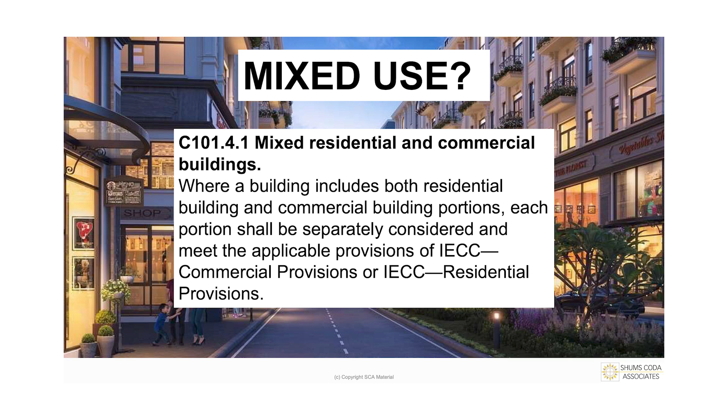Mixed use, all right. So here's where it gets to be a lot of fun. If it happens to be considered a mixed use, it's a 3-story building, and let's just pretend that bottom floor is the commercial portion, right? It's a coffee shop. It's a beautiful coffee shop, wonderful coffee shop that serves all the residents in those upper 2 stories. Those 2 stories above that commercial is considered residential out of the energy code.

So now what you're going to do is you're going to take the provisions of the commercial side, apply it to that 1st story, then go into the back of the book, take the provisions of the residential and apply those to the next 2 stories of the structure.

So because, as I mentioned, this is an interactive class, what is a possibility of how you would demonstrate that on a set of plans? Because is the thermal envelope requirements the same for commercial side as the residential side?

No. So how are you going to be able to demonstrate this on a set of plans to ensure that you present your design appropriately to the building department, that the building department can say, yes, these plans meet the requirements that you find in the code? Then they're able to go out in the field, and so that the contractor is able to understand and know exactly how this building was designed. Any thoughts?

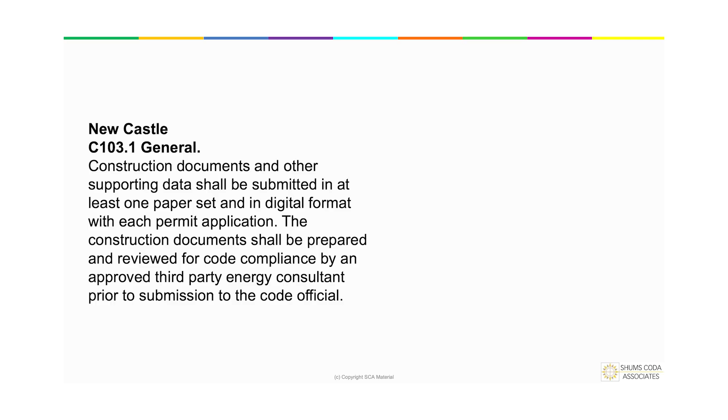Another community - anybody here work in New Castle? New Castle does require that at least 1 paper set and a digital format be provided, and the construction documents have to be prepared for code compliance by an approved third-party energy consultant prior to submission to the code official. So if you end up working in New Castle, just be aware that there is this requirement.

All right, so before we can actually have the discussion about the thermal envelope, one of the things we have to be fully aware of, because it really determines how you're going to treat the thermal envelope, is which compliance path is utilized.

A lot of times I'll see on plans that they say, I'm going to go prescriptive. Well, when you say prescriptive, I need to know which category or option within the prescriptive umbrella you're utilizing. Is it the R value option, the one we probably utilize the most, everybody thinks of an R20 in the wall? Or are you doing the U factor, C factor, F factor option? Or are you utilizing that component performance alternative, which happens to be COMcheck?

Anybody know when the component performance alternative became a legitimate option within the energy code? What edition did it become recognized in? You can shout it out, take a guess. 2012, little too early. Anybody else brave? 18 is a little late, so that leaves you with 15. There we go.

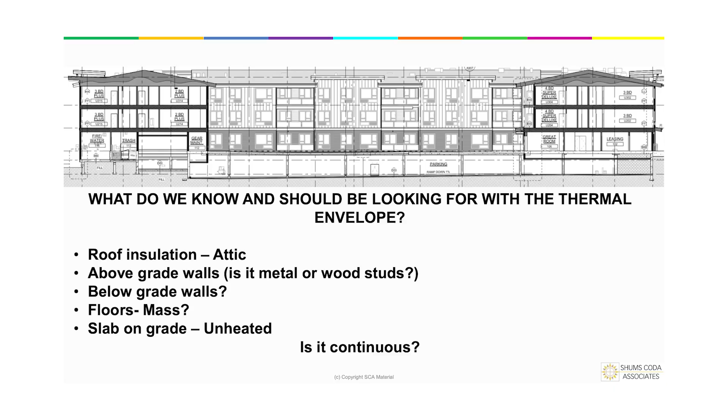So when I look for a thermal envelope, there's some things I look for. I look to see, okay, so where is the insulation for the roof being placed? Is it above roof deck? Is it in the attic? Just so I have a good idea of where I need to be looking for that thermal envelope and potential areas of disconnection.

Above grade walls—are they showing me that maybe they're metal? Are they wood? Just because sometimes that also provides little hints for the thermal envelope.

Do we have any below grade walls? And when I look at below grade walls, specifically, especially in something like this, I'm going to look for garages. Because garages are notorious for having issues with the thermal envelope being continuous.

Floors—am I having to worry about any floors? Looking at this image here, does it look like I have to worry about any floors as part of the thermal envelope? Yeah, there's definitely some distinct possibilities here.

And slab on grade—bless you. Is the slab on grade that's being shown here, one, is it part of the thermal envelope? And if it is, is it heated or unheated? Because that also changes the location of what we're looking for that thermal envelope.

Meaning, if it's unheated, then the thermal envelope is going to reside down those foundation walls. If it's heated, now I also know that I need to pay attention and ensure that we have insulation underneath that slab. And that changes where I look for demonstrations of where the thermal envelope is.

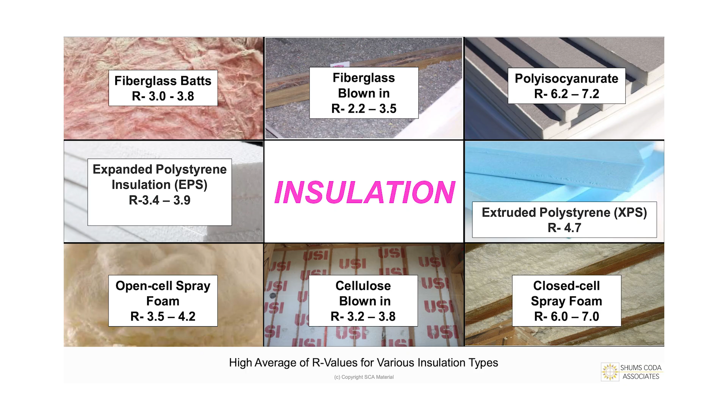All right, so here are some of the more often utilized types of insulation. And what you see on the screen here came from the insulation manufacturer. So this wasn't just Hope doing a search on Google and getting this information. I talked to my colleagues in the manufacturing world, and they gave me the average values that their industry produces for the types of insulation. So as you can see, we go all the way down from a 2.2 all the way up to a 7.2. So that's a significant difference about what we get as far as R value.

Now, one that's not on there that's on a different slide is mineral wool. Mineral wool gets us about between an R 3.8 to a 4.3 per inch, which mineral wool gets called out all the time for fire-rated assemblies. So it's fairly comparable, in fact even better than fiberglass bat insulation as far as R values go. Not better production or anything.

All right, when we talk about thermal envelopes, one of the things that is in the code now on the commercial side that helps with documentation of our thermal envelope is our insulation certificates, right? Now, our insulation certificates are there, and they're required to be placed there when we have a type of insulation that doesn't have that R value plastered on it, right?

So mineral wool will have it plastered. Bat insulation has that R value plastered on what R value this material is, but when you use spray foam, right, does it magically have an R value that shows up when it dries? No. So we have to know what type of insulation and how much of an R value it is. So how we do that is have an insulation certificate provided by the insulation installer. Now there are some requirements with it, depending on the type of insulation that it is.

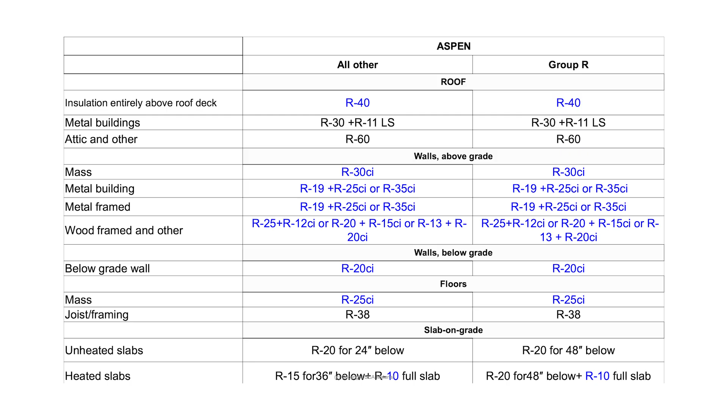I do have a couple of slides dealing with 5. And then these are the requirements if you are designing for Aspen. So if you notice, the values that are listed in blue are the amended values to what you would see within this table. Make sense? I hope. Okay.

So we're going to walk through the components that we have within this table to get a more in-depth view of what we're looking at for the thermal envelope.

So the first one I want to talk about is insulation entirely above roof deck, which we see a lot of in here. If the insulation is entirely above roof deck, you have to demonstrate that you have a minimum of an R30 continuous, or 35, or if you're Aspen, an R40.

Whatever the number is up there, you have to ensure that you meet that as a minimum. Now, with that being said, what do we typically have happen on a roof with insulation entirely above roof deck? Tapering. Yeah - are you looking at my slides? No. So we've got tapering going on, and we want tapering because we don't want our snow or water hanging out on our roof.

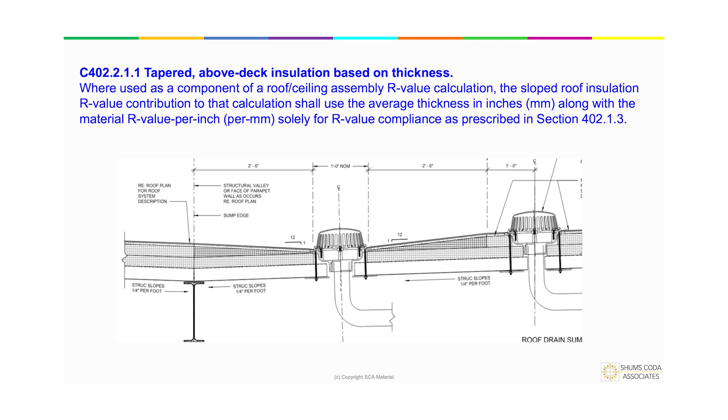We want to drain it away and off the roof. So my question for you is, you have to demonstrate, we'll just say an R30 continuous insulation - how do you demonstrate an R30 continuous insulation when you are tapering that insulation?

You both are right. So basically what they're saying is you can do an area weighted average of that roof, and as long as that area weighted average meets the average or required R value, the R30 since we're just using that one - does that seem like a lot of math? How many people here love doing math? I always have one person who loves doing math. I don't like doing the math. I'd rather just do a minimum insulation and call it a day. Well, that's really good because I'm going to give you a way of doing that.

So one of the things we have determined, because the reality is, if you're trying to get an area weighted average of an R30, what is that going to entail? To get an average, that means you have to have something higher to offset what the lower is going to be. So as a rule of thumb, if you're required to have an R30, if you say I'm going to install as my baseline an R35 with tapering to average an R30, I'm going to accept that all day long.

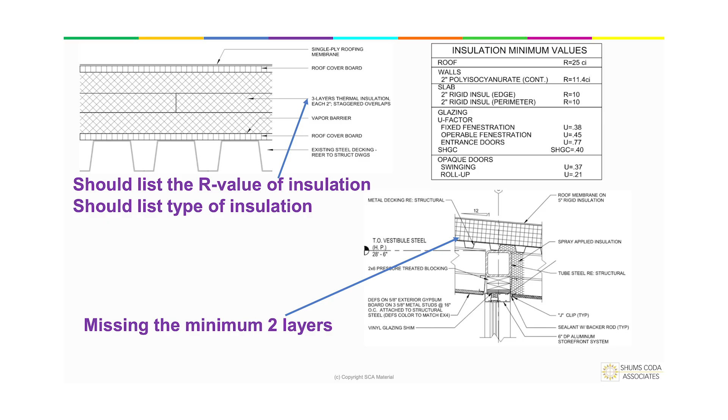Exactly. Rigid insulation, guess what? Rock wool is considered rigid insulation because they have a form of rock wool that they call their rigid insulation. So we got rock wool - that only gives us a 4.8. 4.8 times 5 is not 30, right? Rigid insulation could be the styrofoam insulation, right? And that only gets us, what is it, 3.8? Doesn't get us where we need to.

Now it could be polyiso. 5 inches of polyiso is going to give us better than 35, which would be a great start, but we don't know. Plus, it shows only one layer. It's required that you have to have a minimum of 2 layers for our rigid or above roof deck insulation. So, looking at this image, would you say that it's meeting the requirement that we need for above roof deck insulation?

And it does show the R value, but not on this picture. I'll just give you a hint: the R value of the design met the requirement. So take the R value requirement out of the equation.

What is a stagger? Oh, that's an excellent question. Does the code have a definition of what's staggered? The manufacturer might - ah, there you go. That's where you'd have to go.

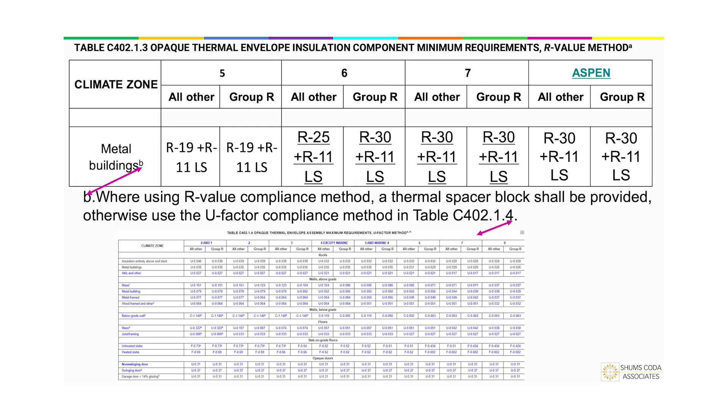The Energy Code does provide a definition as to what a liner system is. That liner system consists of having a vapor retarder underneath the purlins. Then we have insulation placed between the purlins on top of the vapor retarder. And then we have insulation laying across the purlins, going perpendicular to the other insulation installation. And that all together creates a liner system.

So we have the R19. That R19, that first number, is the number that goes in between the purlins. The R11 LS is the insulation that goes over the purlins and over the thermal.

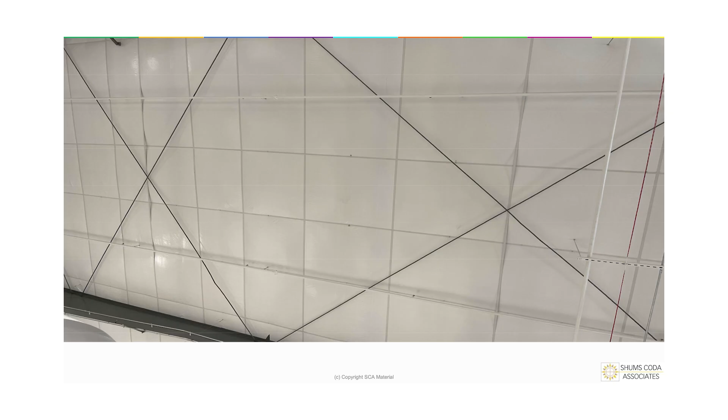So looking at the installation here, would you say, I know you can't see everything, but from the angle that you get to see here, does this meet the intent of what is required for the design of that metal building roof? Yeah, they did a good job. The vapor retarder here is located below the purlins.

Yes. So in the majority of these buildings, you're going to see fire separation occupancies along the length of a 150-foot building. And in our experience, especially in the local counties, the fire separation wall is going to go up and compress the insulation up against the metal decking, up against the thermal break. It's also going to either cut or compress the liner system. Neither one of those are addressed in the code, and the building officials seem to struggle with that. One violation of the fire code for the fire separation wall going cleanly to the metal deck, and being fire safe or caulked, and then the compression and lack of insulation above the firewall.

I'm glad you brought that up, because the Energy Code does address that concept. If you go into Chapter 1, as long as the jurisdiction has not amended out Chapter 1, which unfortunately a lot of jurisdictions have done in the past, Chapter 1 basically says there's a section that says the Energy Code cannot impede safety, health, welfare requirements. That fire separating wall meets that requirement, or that situation.

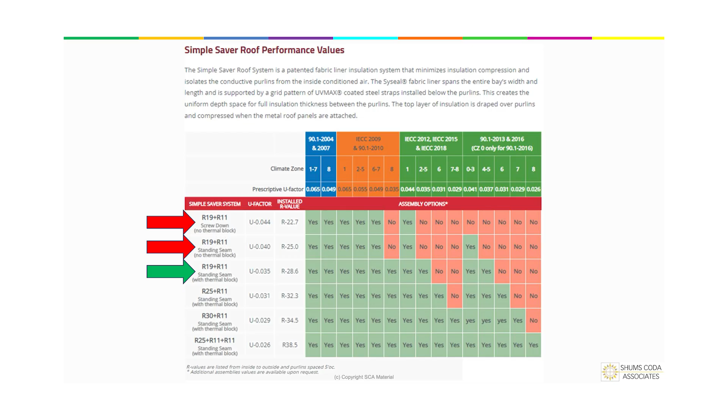Attic insulation probably doesn't need much explanation. You'll notice that if you're in climate zone 7, or designing in Aspen, you're required to do an R60. Keep in mind, depending on the type of insulating material you use, half-inch gypboard may not be sufficient for the structural integrity. You may have to jump up to a thicker gypboard. But it's dependent on the type of insulation and its weight.

The one thing I want to talk about with attic insulation is you cannot rest insulation on top of removable ceiling tiles and count that as part of your thermal envelope. You can have insulation up there, and if you have an office right next to the restroom, I highly suggest putting insulation in that area. I had somebody call and yell about it because she had an office next to the restroom and was tired of hearing her coworker's business. I get it, but otherwise it has to be placed in the attic area and not resting on the tiles.

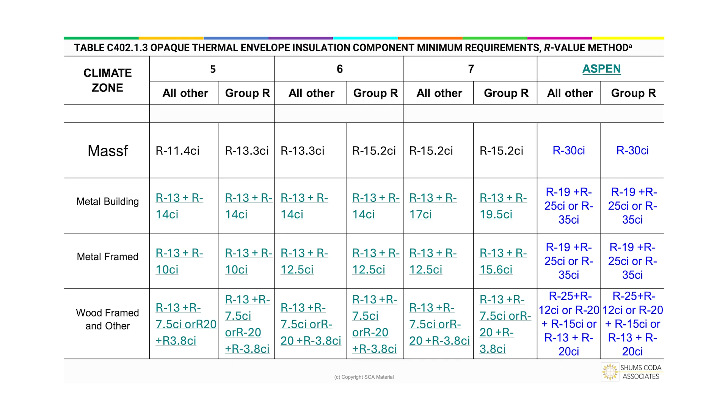For the amount of insulation that above-grade walls would have to have, in climate zones 5, 6, 7, with the last one being Aspen, you can see the insulating values are going to be significantly different. So it will entail a bit more forethought in how you're going to design these for Aspen.

Let's talk about the first one. Our first one is dealing with mass walls. What's a mass wall? Make up a church. That's a good one, Rick. I have to say that's probably the first time I've ever heard that one. I'm going to use it in the future, somehow, some way.

So, mass walls. You see that little footnote F? It didn't come out well here, but footnote F sends you to section 402.2.2, which gives us information about what a mass wall is. A mass wall has to have a component that weighs not less than 35 pounds per square foot of wall surface area. I need to look at this again. The other option is that it weighs not less than 25 pounds per square foot of wall surface area, and has a material weight not more than 120 pounds per cubic foot.

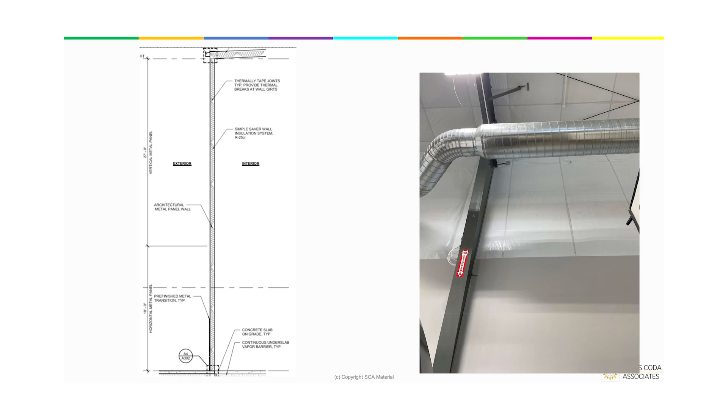As you can see here, not only do you have to install a cavity insulation, you also have to install a continuous insulation value if you're going with the R value table. So in the instance of what we see here, because you really can't see it, what they provided was just insulation. Now they provided a system for it, that Simple Saver system -- I'm not promoting Simple Saver, it just happens to be a lot of times when I get metal buildings, that's the insulation system that they call out on it. But for the walls, in this instance, it's just one insulation layer. It doesn't meet this, even though this says right here, an R13 plus an R14 continuous.

If they were putting an R27 in the cavity, does that count? Does that work? Maybe they'd have to go in and use COMcheck, because even though if you take the numbers 13 plus 14, that does equate to 27, absolutely.

But the R14 is continuous insulation. So basically what you would have if you were just installing 27 is you have 27 in the cavity, an R6 -- 27 in the cavity, R6, because that's the stud R value, potentially -- 27. So is that the same as having an R14 continuous insulation that has no interruption from that framing member that assists with the thermal bridging? Continuous insulation -- I know lots of people have concerns about continuous insulation, but continuous insulation really does have its place in the thermal envelope, because the reality is in physics, it's not made up.

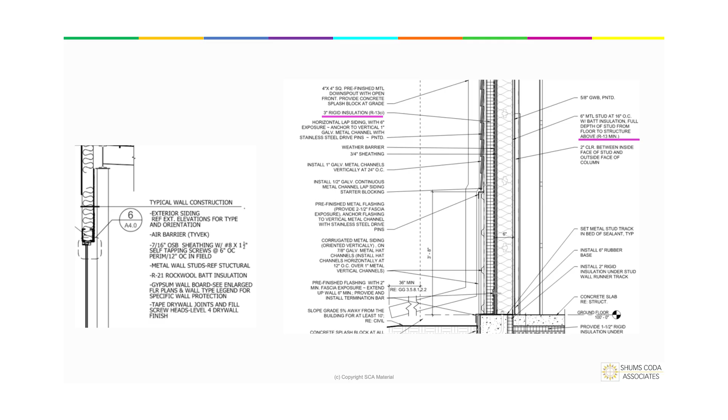Potentially. Here's where it becomes a problem. Right here, it tells me that as an optional replacement of rigid insulation, you can have OSB and house wrap with zip panel. Are we okay with that option? Or did we just reduce the thermal envelope?

Potentially. It's really dependent on the zip panel. Is the zip panel an insulated zip panel? Because they have R3, R6, R9, right? So it could be somewhat of a fair trade if they're going with the R6, but not if it's an R3, because 3 is less than 3.8. It's not a fair trade of an option.

You still have to ensure that that continuous insulation is going to meet whatever it was designed for. So in this particular option, there's a potential that that continuous insulation goes away. What happens when we don't have a thermal envelope installed the way it had been called out on the plans out in the field?

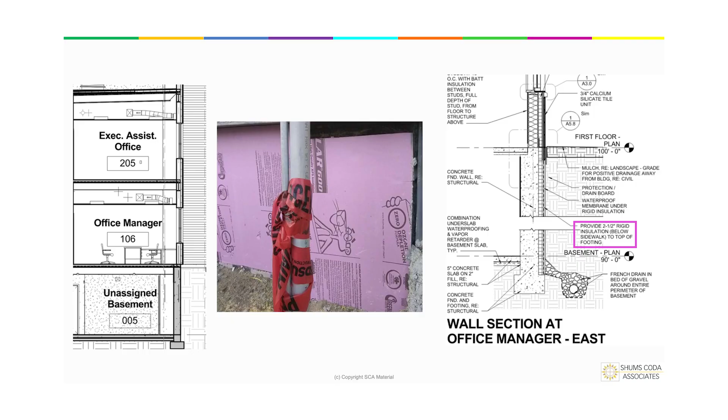So here's an example. How many of you get below grade walls for commercial projects? Anyone? A couple? All right, it's not probably as common as we see with residential, right? But I've had really one project in my career that actually qualified as below grade per the definition.

And it happened to be this one. It was the manager's office, which I felt bad for because they were stuck in the basement, no windows, nothing. It was like, we're going to hide you from the light of day. But they did a fairly good job demonstrating that insulation component.

And it was continuous insulation. Now, the installation of it was shown great on the plans. The actual installation of that continuous insulation, we'll just say there was drastic room for improvement. Everybody has good things and bad things that you need to work on.

All right, let's talk about floors. How many of you just love the idea of figuring out how to deal with a thermal envelope for floors? How many of you cringe as soon as I said floors and thinking about how to deal with it with the thermal envelope? All right, well then, I think it's wonderful.

So if we have mass floors, you're required to have continuous insulation. If you have a joist floor, you are required to have cavity insulation. It also has to be in constant contact with the underside of the subfloor.

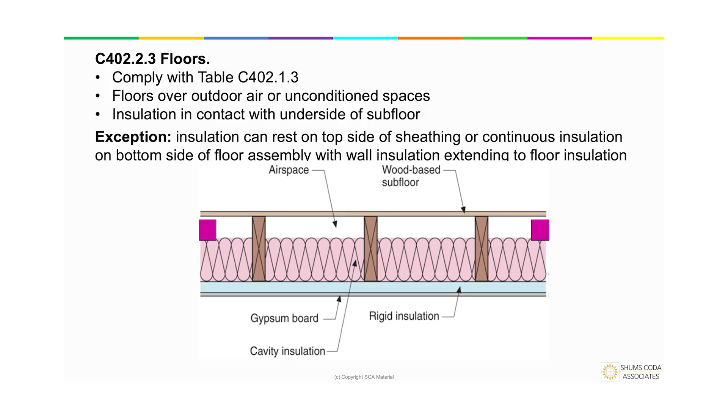Now, what you are permitted to do is extend the above grade wall into the floor cavity and allow that floor insulation to rest on top of gyp or continuous insulation, whatever the case may be, as long as you extend that wall down into that floor cavity.

And the idea is if you don't, then you have that break within the thermal envelope. And so that's why the above grade wall is going to extend down. Doing that on the inside of that as well is acceptable, right? Yes, yes. All right, let's talk about our slabs.

If you have an unheated slab, and that slab is 12 inches or less below grade, you will then have to insulate your slab from top of slab extending down. Obviously, we're making sure we still have continuity of the thermal envelope, but the idea is you're going from top of slab down. You can do it on the interior or the exterior. It's kind of up to you, but the important thing is...

Taking a look here, we have to insulate down for the distance. Now, here's the really nice thing, and I guess we'll talk about it in the next slide, but there is a little caveat for that.

Now, the other one is if it's a heated slab. Now, not only are you going to insulate the foundation, you're also going to insulate underneath the slab. And it's an R5 for the entirety of the slab.

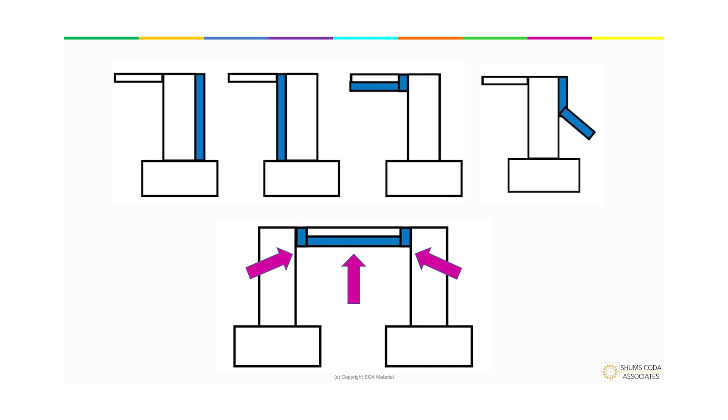And here are some configurations that are accepted. You can have it on the exterior of the slab or the foundation. You can have it on the interior side. This one is always a concern a lot of times for the architects and those designing it. And what we have suggested is, a lot of times the structural engineer is saying, hey, we need a control joint there. So you can ask, will having that continuous insulation there work as your control joint?

I've seen it work, I've seen it not work, or the structural engineer says yes, or the structural engineer says no, because sometimes we need that compression going on as opposed to having that little bit of a break. But that's okay, because you can still place it on the exterior side.

You can go from top of slab, bottom of slab, and then underneath the slab for the remainder of the distance. You can go on the outside, top of slab, extend down, and then extend away from the foundation. But whatever part you extend away has to be covered with at least 10 inches of dirt or concrete.

And then the configuration we have down here is for the heated slab. It goes from top of slab, bottom of slab, and then you have to insulate under the slab. Guess what? They don't require that you do it for the remainder of the distance. Once you get to the bottom of the slab, they're calling it good, because technically your thermal envelope stops underneath the bottom of the slab, right? So you don't have to extend it down further.

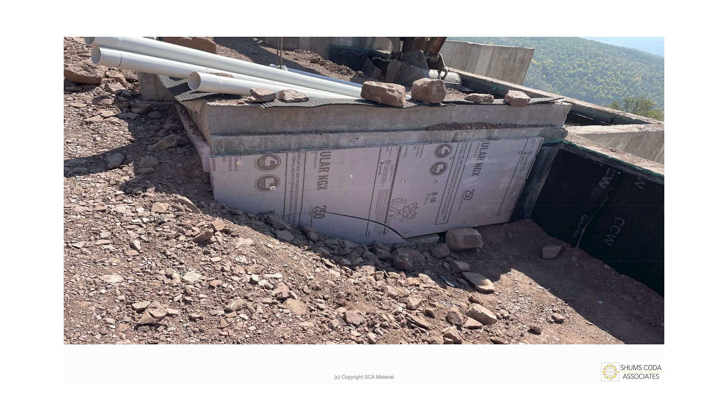All right, so what do you guys think about this one? Here's what I'm going to say. In the installation, something that happens all the time when I go out and take a look, what do you see at that corner? You see a gap. Corners are notorious for gaps to happen, and this is just one of those areas. I could probably pull up 30 pictures of gaps at corners. It's one of those areas that when you first look at it, you think, we got insulation on this side and this side, we're good. But this is an area everybody needs to do better with. That's the area I think we could really work on.

All right, skylights. You have to insulate the curb of the skylight. It has to be at least R5 insulation, or the R value for the above roof deck, whichever is less. So basically just ensure you insulate it to at least R5.

Now, skylights are required if you happen to be one of these occupancies. You have a roof height of at least 15 feet for 75% of the space, and underneath that space is at least 2,500 square feet. At that point, skylights are required.

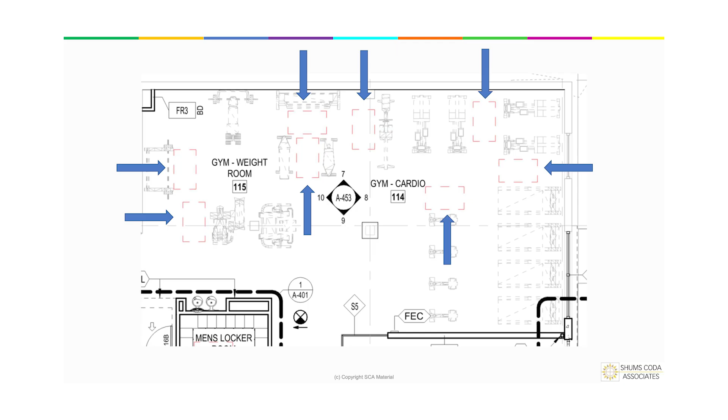Here's an example. Let me show you all the skylights in this gym cardio area. They're required to have a minimum of 3%, not more than 6%. For this project, they had one in the men's locker room, one in the women's locker room, and the remainder of the skylights in this very large gym, probably about 11,000 square feet, all resided in the cardio weight room location. So a lot of natural light to highlight all the efforts of pumping iron, I guess.

All right, let's talk about our glazing, our fenestration. Our fenestration has some very distinct requirements. Here's our requirements if you're just outside of the 2021 code. Here's the requirements if you're working in Aspen. You'll notice that the U factors and solar heat gain coefficient are significantly reduced within Aspen's amendments.

Now let's take a look at the solar heat gain coefficient, because in this table it's broken up by whether you're a fixed window, an operable window, or an entrance door as far as your U factor. When it comes to the solar heat gain coefficient requirement, it's based on whether you're fixed or operable, and it's also listed by your PF. What's PF? Yes Rick, gold star for you, projection factor.

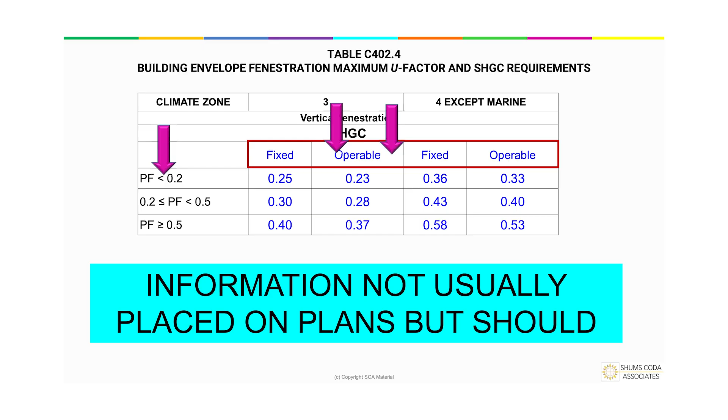Now with the projection factor, that takes us back to which line we would look at. Since it's greater than 0.2 but less than 0.5, this is the maximum solar heat gain coefficient for each window. But here's where it gets to be a lot more fun.

In this design, our projection factor for this window is going to be different than what our projection factor is for the floor above.

How many of you just said, oh, I hate you, Hope? It's okay, I got broad shoulders.

I'll take it. So how this is often addressed, instead of doing all of the math and saying this window has to be a 0.36 and this window has to be, down here, a 0.33, typically what I see on the plans is they'll call out and say, hey, all windows will have a maximum solar heat gain coefficient of 0.33 because that's the most restrictive value in there. And so if everything has that, then all that means is you might have windows that meet what's in this table, and then you might have a few windows that are a little bit better than what's in that table. But it also helps that you don't have to do all that math for every window on every story on every floor, right?

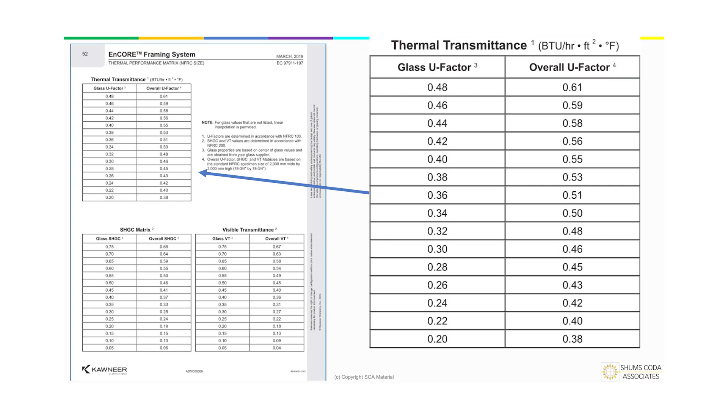So if they say the U factor is going to be 0.32, then you can look at this and get an idea of what that would be. So this is the U factor at center of glass. You'll always get the center of glass and then you'll get the overall assembly U factor. You need to be looking at the overall assembly U factor. So in this instance, we would look in this row to ensure that the windows that are being called out actually meet that requirement.

And then, as Derek mentioned, I'm going to take that NFRC certificate and take a look at the lovely non-easily readable ticket that's left on that window, because it's not like our residential windows that say, hey, I'm a U factor of this and I'm a solar heat gain coefficient of this. We get to take this, try to decipher which number am I looking at to find it on the NFRC certificate to say, oh yeah, that is a 0.38. Oh yeah, that is what the plans say. So that's the fun of it.

All right, the most dreaded new section of the 21, I think, is the air barrier section, because it used to be the choice of you can either go prescriptive, which is follow all of these requirements and we'll call it good, or you can do blower door testing. In the 21, basically, unless you fall under one of the few exceptions, all projects are going to have a blower door test performed. And I would say buckle in and get really good at it, because those numbers in the 24 get reduced significantly. So practice makes perfect.

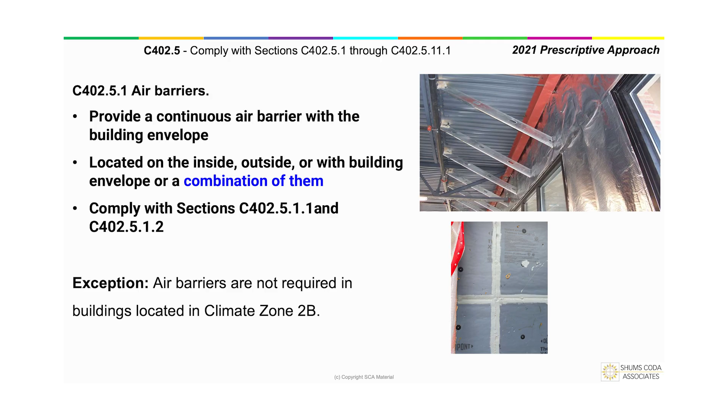So you can have your air barrier on the interior, on the exterior, a combination thereof. Whatever it is, it has to be continuous. And it's not just the walls that are required to have air barriers. The roof, anywhere the location of the insulation and the thermal envelope resides, you have to have an air barrier there.

All right, so the very first one here, it says I want to talk about this one right here. It says you got to comply with C402.5.1.1 and C402.5.1.2. We're going to skip 1 and go directly to 2, and then we'll come back to 1. 2 says, hey, if you're a Group R or Group I occupancy, you're going to comply with C402.5.2.

402.5.2 tells us that you're going to be doing blower door testing if you're a dwelling or sleeping unit. You're going to ensure that you do not have an air leakage rate that exceeds 0.30 CFM per square foot. Now, that metric is a much better testing metric than air changes per hour, which is heavily predominant on volume. When we're looking at this, this is typically like an apartment, multifamily, sleeping units, things of that nature, so you don't have the volume with it, and the CFM per square foot is a much more neutral metric to utilize.

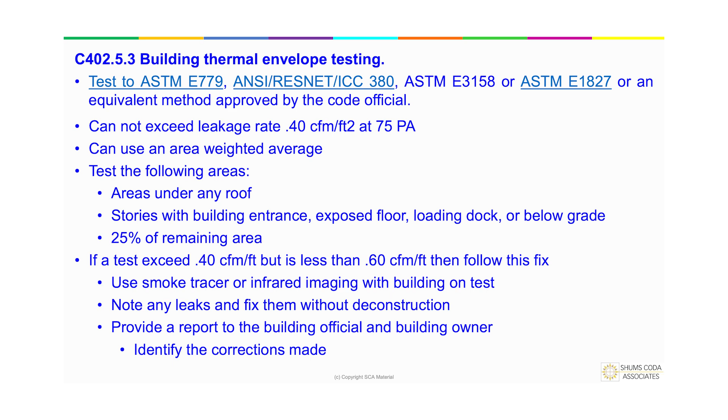All right, let's talk about number 2, which is anything that isn't a Group R or Group I occupancy. Now you're complying with C402.5.3. So let's see what that section has for us. This section has different testing standards than what we saw because it's dealing with a different type of concept for it. It says in this one that you cannot exceed 0.4 CFM per square foot.

Now, the difference between the residential, you're like, well, residential is 0.3. Isn't that less, more restrictive than 0.4? And you have to think of it, it's not exactly apples to crab apples here, because residentially, the Group R and Group I's only had to do it to 50 pascals. Those that aren't Group R and Group I have to do it to 75 pascals. So that's one of the differences on that.

You also get to do like an area weighted average, because we might have, I think we've all had those, right? 50,000 square foot buildings. And so it's going to allow you to do the area weighted average.

Now there are, yes. Oh, I'm sorry. Oh, no, go ahead. On your last slide, we had a project at multiple hundred units, and the unguarded test came back that the inspector required the adjacent units to have doors and windows open.

Well, here's a great thing. So in this particular instance, they have to test it to the testing procedures out of ASTM E779, ANSI, ResNet, ICC 380, which is pretty much what we're used to residentially, or ASTM E1827. So whatever those testing procedures require is how they have to test. The inspector can't say to the contrary because the code says you have to do it per this. And if the testing metric or procedure says those doors have to be open, then you would have to. But if it's not addressed in those testing procedures, you have to follow what these standards require.

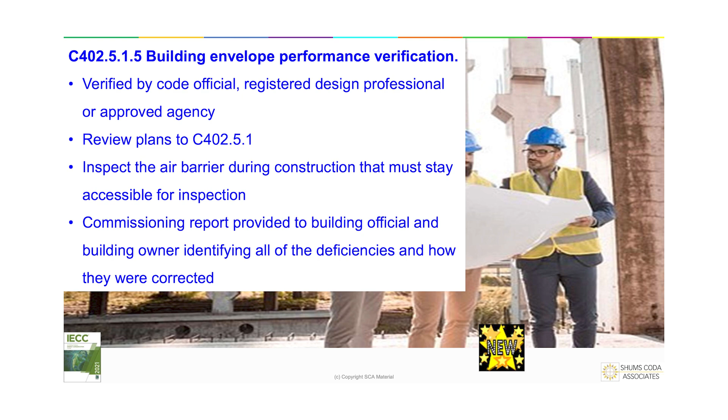Make sense? Now, the third option is if you don't fall under option 1 or 2, now what you're going to do is comply with C402.5.1.5, which is basically thermal envelope commissioning. So you're going to either have the building department, the building official, a registered design professional, or an approved agency do it — obviously somebody not associated with the project.

What they're going to do is review the plans. They're going to document the issues that were found on the plans and how they were corrected for the air barriers. Then they're going to go out into the field, do periodic inspections of the air barrier, and write up any issues that they found, how they were corrected. At the end of the project, a report is going to be provided to the building owner and the building official that states here's where the deficiencies were and here's how they were corrected.

So now what we're going to talk about is the part that basically everybody's going to do — the prescriptive items. These are all things that are not new, we've had them in there forever and a day, so we'll go through them.

Basically, we have to ensure that our air barrier is continuous. We have to take into account that we know we're going to have joints and seams — we've got to seal all those up. We have to ensure that whatever material there is is secured and is going to stay secured, taking into account things like wind, stack effect, ventilation, and all of that.

Number 3 here talks about sealing up penetrations. We've got to make sure that whatever material is utilized is suitable and compatible with what it's trying to seal up. So in those penetrations, you aren't going to use packing tape, right? Because packing tape is not suitable for the material and the location. You might say, that's an odd statement, why would you pick on packing tape? Because the reality is I've gone out and seen packing tape utilized to seal up a penetration. Unfortunately, it happens. Whatever it is, you have to ensure it has the capability of dealing with stack effect, negative pressure, wind, mechanical ventilation, or vibration.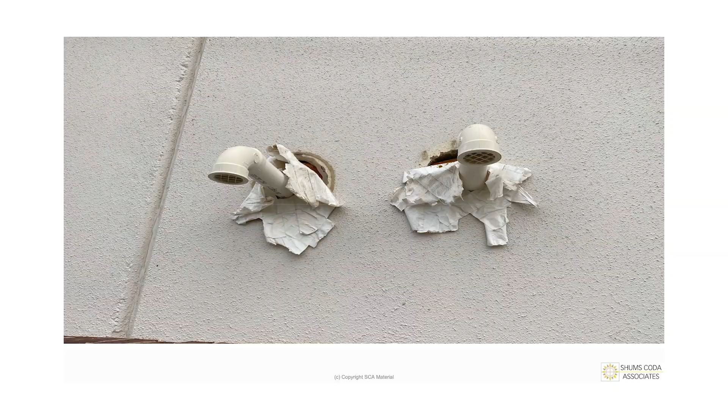So this was, I was at a drive-through, right? They had just redone this whole wall deal due to a natural disaster, so it was supposed to be sealed up. I jump out of the car, and the person driving is like, you got to stop jumping out of the car for pictures, you're freaking me out. But I see this and I take a picture. You could look through and see the other side. So not only was it not sealed, this is an exterior wall, no insulation in there either. So that was a fun one.

Another one to be aware of that I see all the time not sealed up are penetrations going through CMU walls. Just because it goes through a CMU wall does not mean it's exempt from having to be sealed. It still has to be sealed, and you still have to use a material that's suitable for it. Plus you got galvanic action there with steel, so that's why you have to have something compatible.

Packing tape might be a good solution to that. Just kidding. Do you usually get manufacturer's specs to confirm if something is compatible? Is that how you guys are doing that, or? Do you want to know how I do it?

So what I do is really dependent, obviously, on the project. I will require that they specify what they're going to utilize. And just through experience, because I've been given all that information in the past, I can see a material and say, oh okay, I remember that from this project, it was permitted, so it would work with that. So as a whole, for just kind of starting to get that information, I think it's a wonderful idea to have that manufacturer spec that says it will work for this material in this condition. And then you start building that library where you have that experience too, to know this will work with this.

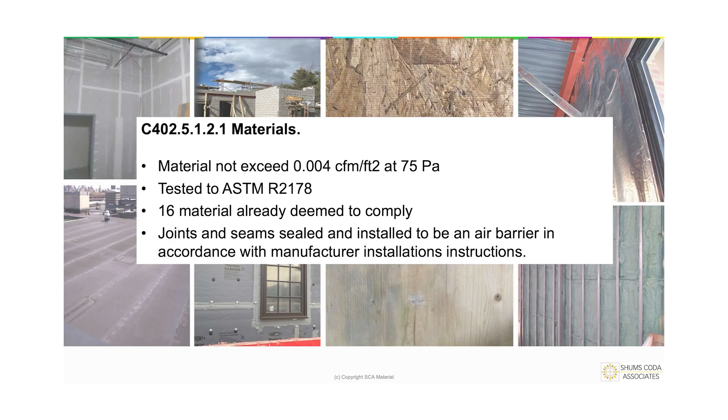Now the Energy Code does have materials that are already deemed to comply. They demonstrate that they do not exceed 0.004 CFM per square foot at 75 pascals. And so the 16 items, we're going to go over them really quick: OSB, plywood. Remember, if you call these out as your air barrier materials, all of these have to be sealed, all the joints and seams have to be sealed. Extruded polystyrene.

This is one material that can take care of multiple requirements out of the code. It can be your air barrier, it can be your continuous insulation. A lot of them are permitted to be your water resistant barrier, so it could also be part of your vapor retarder strategy. So one material can often take care of multiple requirements, and there's a plethora of materials out there that fall under that category.

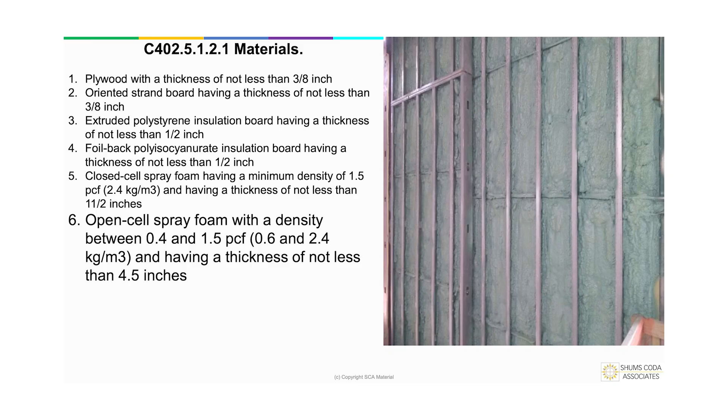Foiled face polyiso, that can also be an air barrier. Open cell spray foam, as long as it's 4.5 inches. Closed cell spray foam, as long as it's 1.5 inches. And then our gypboard or cement board. Our gypboard can be on the interior or the exterior. All we have to have is at least 1/2 inch of it to qualify as an air barrier.

Then we have our 3 roofing materials. Now, the reason why we have 2 11s here is I just wanted to illustrate that things did shift a little bit in the 21. Before it had to be fully adhered single ply, and now it just has to be single ply. So it doesn't have to be fully adhered anymore. So Portland cement sand parge.

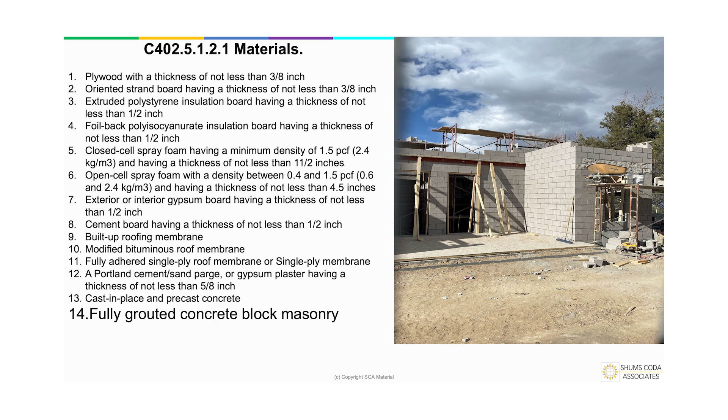We also have cast in place and precast concrete. That's how they meet the requirement of an air barrier. Fully grouted concrete block. Sheet steel or aluminum. This is how metal buildings have an air barrier. Their metal skin is their air barrier.

So those are our 16 items that are already deemed to comply. And then we have 3 assemblies. Now an assembly just has to demonstrate that they don't exceed 0.04 CFM. At that point, then they're deemed to comply as potentially being an air barrier. So as you can see, we got 3 options here for air barriers.

I'd say stucco, probably not, probably one that I'm seeing more and more being called out as an air barrier. So out of those items that I listed, what materials have you seen out in the field called out as an air barrier that was not listed?

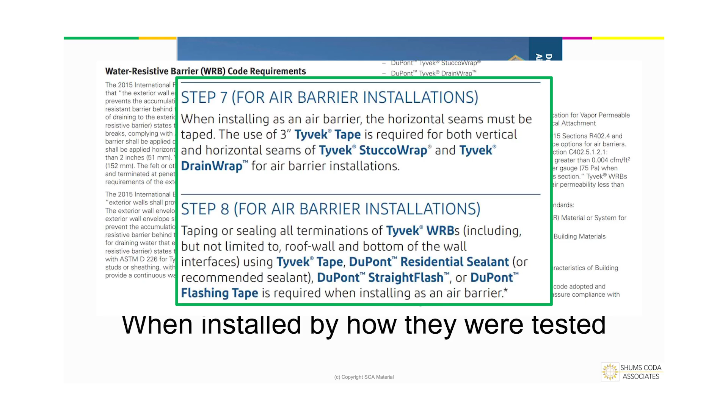So I have had this conversation about the water resistive barrier. Now water resistive barriers, the house wrap, Tyvek, for product name one out there, could potentially be an air barrier. They have to demonstrate that they do not exceed 0.004 CFM per foot. Well, they have been tested. Some of them have been tested to meet that qualification. The reality is you have to install it the way it had been tested. Most of the time it'll say you only need a 6-inch overlap if it's being installed as a water-resistive barrier. But if it's going to be installed as an air barrier, it now goes from that 6-inch to 18 inches.

There isn't, I have yet to see material, and I haven't looked in quite some time, but I have yet to see the material of where for a water-resistive barrier, Tyvek for house wrap, whatever, that has the same installation requirements for a water-resistive barrier as an air barrier. So there are, as far as I know, there are still instances of that out there.

What about DensGlass? DensGlass is often called out as your exterior sheathing for commercial buildings. Is it an air barrier?

All right, let's talk about it. If it's mud and taped, absolutely. Now you'll notice that DensGlass and those types of assemblies, materials, all they are is a 1/2-inch gypboard or 5/8 gypboard with a fiberglass mat on both sides. Remember, in that table are items that are already deemed to comply. Number 7 says interior or exterior gypboard as long as it's a 1/2-inch. So DensGlass qualifies for it.

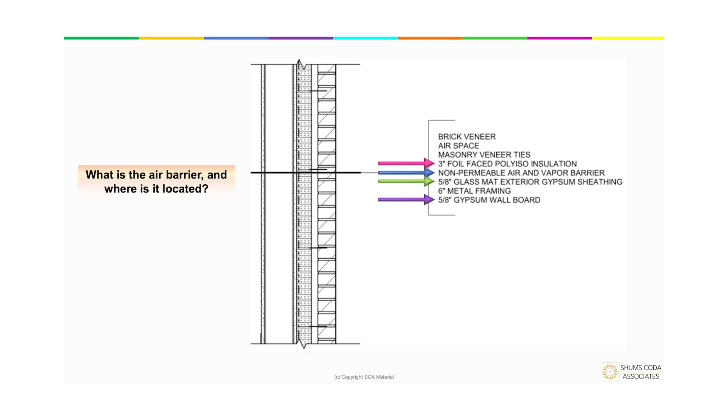Now on the screen here, we have materials that are deemed to already comply, but it's not called out as to what the air barrier is. So one material that could potentially be an air barrier is this non-permeable air and vapor barrier. Now the terminology in there is incorrect. It's not a vapor barrier. Are we talking about a water-resistive barrier or a vapor retarder? Because a vapor retarder is required on the interior side of exterior walls and not on the exterior side. So the terminology is wrong. So that becomes a question.

The other one is we have 3 inches of foiled face polyiso insulation. That's a material already deemed to comply. We have our gypboard on the interior. We also have our gypboard on the exterior. So we potentially have 4 items on there that could potentially be our air barrier. And which one are we paying attention to ensure that it's sealed? That's what we need to get.

And I would say for the architects in the room, get very familiar about calling this out, because when the 24 gets adopted, they have a brand new section that basically gives you a list this long of things that have to be called out on the plans. It can't be placed in the spec book.

It is specific, and the amount of information and details that have to happen now are pretty significant. So I would say start now, since everybody's getting ready to look at 24.

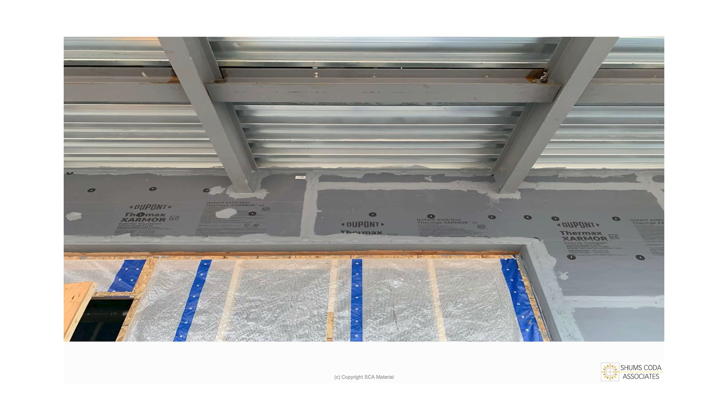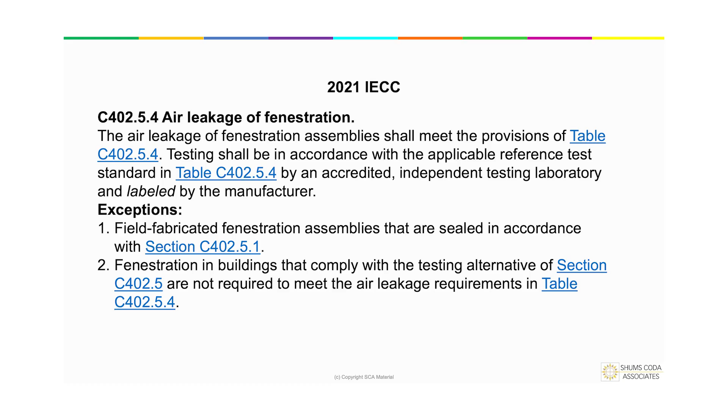Doors leading to chutes, elevators, stairwells, all of those have to be sealed and have weather stripping on them. We have to ensure we've done all this work on our air barriers and our thermal envelope, and then we put these big, enormous openings for air intakes and exhaust, which we should.

But now we're just saying, hey, throw a damper on that to ensure we're doing something good. For cargo docks, we've got to make sure we put something that will limit the amount of air that happens at the top and sides when vehicles are backed in and those doors are open so products can come in and out, right?

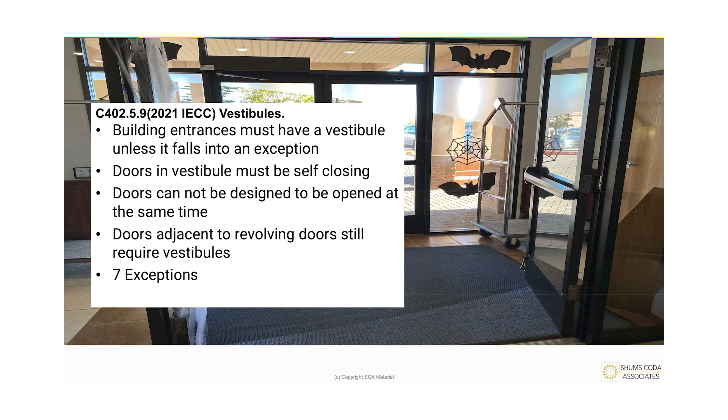Vestibules are required when you have an entrance, unless you fall into one of the exceptions. Those vestibule doors have to ensure that this one opens and this one isn't open, in theory, unless you have people crossing at the same time, then those doors are going to be open at the same time. You're not required to have a vestibule at a revolving door, but we are required by code to have a side door next to that revolving door, so ensure that side door has a vestibule with it. There are some exceptions.

Here's some exceptions to it. Air curtains, you can use an air curtain instead of a vestibule. That actually came into the 2015 code, because until then, if you were an existing building, you had to comply with the full extent of the code except for a couple of exceptions. So the idea was, let's not make them have a vestibule because it's not always conducive when you already have a constructed building. Let's say they can use an air curtain instead. At the same time, in 2015, Chapter 5 came about. This has never been removed, so air curtains are still accepted.

Here's some examples of vestibules. Here's one to be aware of. Most people would think about these doors having to comply, but guess what? This door and this door within that vestibule also have to comply with it.

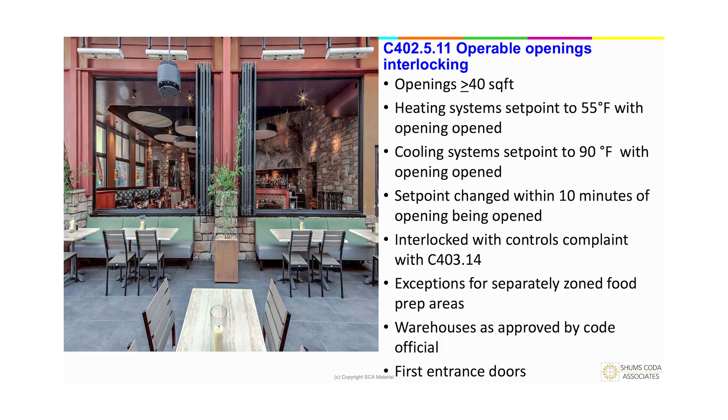The other thing is we have a lot of big, giant doors or walls of windows that open up to let the outside inside. You can do that, you just have to ensure you have interlocking controls so that when those doors are open, the set point for the temperature changes inside, so you're only heating to 90 or cooling to 90 degrees and heating to 55 degrees, unless you have it zoned.

There's an exception for areas where they're cooking food. We don't want the chefs and cooks to pass out from heat exhaustion, so those areas can have different temperatures as long as they're zoned separately.

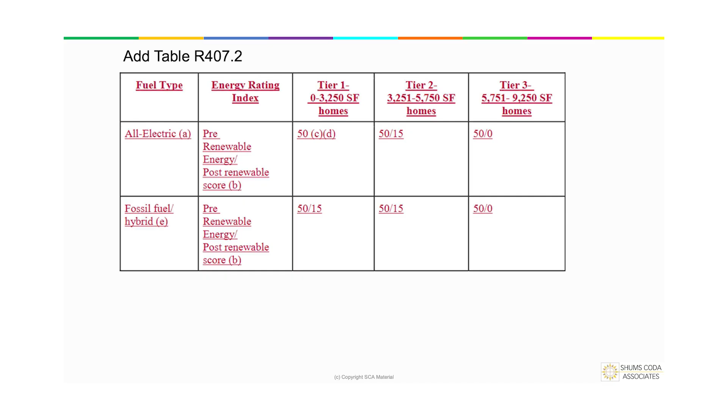407.2 basically says that you are going to demonstrate an ERI score, and your ERI score has to be equal to or less than the value found in table 407.2. Here is table 407.2. I know it's really hard to read, but I had to cut and paste because it wouldn't let me put it into a table, so I couldn't blow up the verbiage and everything on it.

So basically, it's determined by your fuel source. If you have an all-electric building, you're going to follow the first row. If you have a fossil fuel or hybrid system in your design, then you're going to follow the second row.

The first row says, depending on the size of the structure, if you go from 0 to 3,250 square feet, you have to get an ERI score of 50. If you are 3,251 to 5,750 square feet, you now have to get a 50/15, meaning you get a 50 before solar is installed, and then when you have put your solar on, you have to demonstrate that your ERI score is 15.

And if your home is 5,751 to 9,250 square feet, now you're getting the base where it's 50, and then you're going to show 0 when solar's put on.

I'll be quite honest with you, in this particular instance, there's not a lot of changes for if you have fossil fuel, other than if you have a smaller home, where in the all-electric you only had to get a 50 ERI. Now it says you have to get a 50 ERI, before solar, and then when solar's added, you have to demonstrate that you get an ERI score of 15. So there we go.

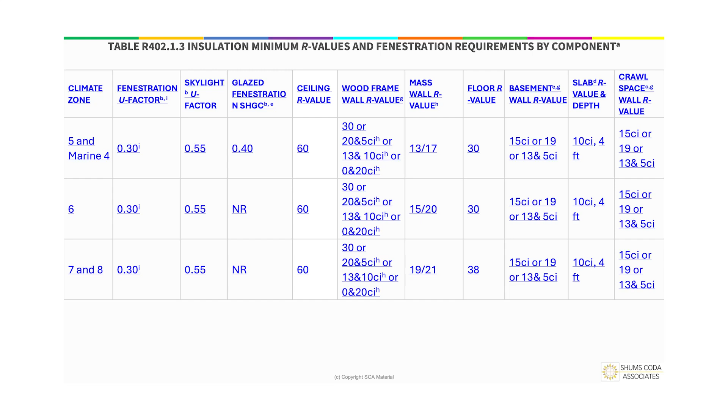All right, so here are the values - don't mind me as I struggle to get up. Here are the values that you would find as if you were looking at the 2021 code book. This is if you're in climate zones 5, 6, 7, and 8. Here are the amended requirements for Pitkin County and Aspen.

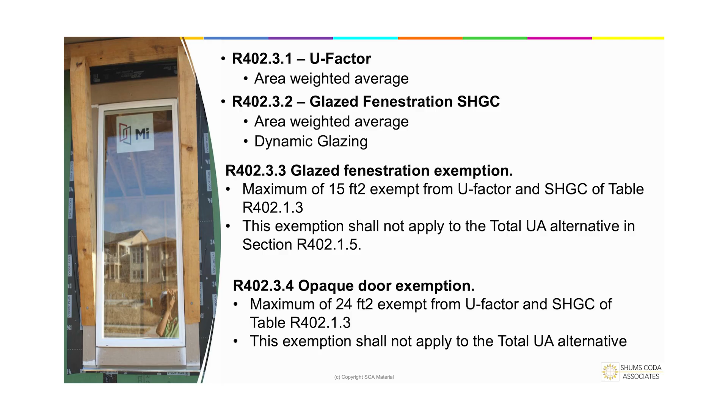Now here's where it gets to be a little bit of built-in flexibility, unless you are in Carbondale or Pitkin County, where they specifically said that unless you fall under these very special criteria, you're just complying with 407. If you are going with the true R value of that table and just going with the R value of the prescriptive option, then there are some sections in here that apply to the fenestration. One is you can do an area weighted average of your U factor. You can also do an area weighted average of your solar heat gain coefficient. There's also this nice little flexibility built in where you get an exemption from that U factor and solar heat gain coefficient requirement in the table for up to 15 square feet of fenestration.

It's only allowed if you're going with the R value table. If you're going U factor or total UA, it's already built in, you don't get to do it. You also have an exemption for opaque doors of 24 square feet from the requirement out of the R value table, and you say, where is that listed that there's an R value for it? There used to be. This was in there way back when, and it's never really been removed. But you still have to maintain continuity with that thermal envelope and the R value with it.

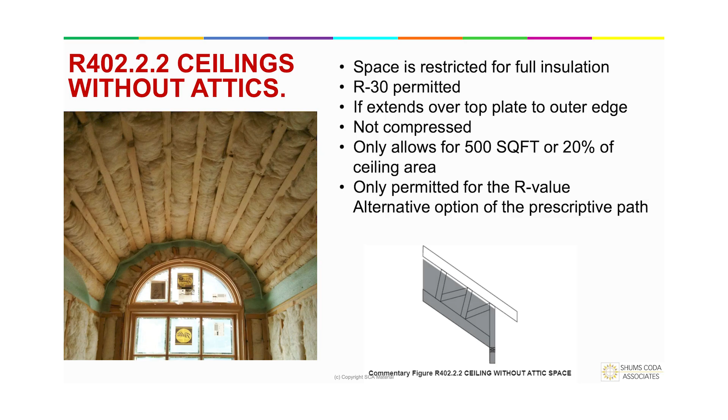Another flexibility option for the R-value option of the prescriptive path: for up to 500 square feet or 20%, whichever is smaller, you're permitted, when you have ceilings without attics, to install R30 in that area. The idea is you have that bump out, which typically doesn't have the full depth of attic space—just a little bit of space. So you could get an R30 in that little bump out area, and it works because it's not a huge amount. You're just doing a nice little seating window area that's 200 square feet, so that 200 square foot area only needs to be R30.

The other thing is eave baffles. If you have a vented attic and your insulation rests at the ceiling level, you have to have eave baffles. This isn't only a requirement from the energy code, it's also a requirement from the residential code—if you go into section 806, it talks about maintaining a 1-inch air gap at all vented areas. The idea is that air doesn't just stop because you put in a baffle; it goes to the path of least resistance. So if there's not a baffle in each bay, it causes havoc in the bays that don't have baffles. The energy code says, don't forget, you have to put it in every bay.

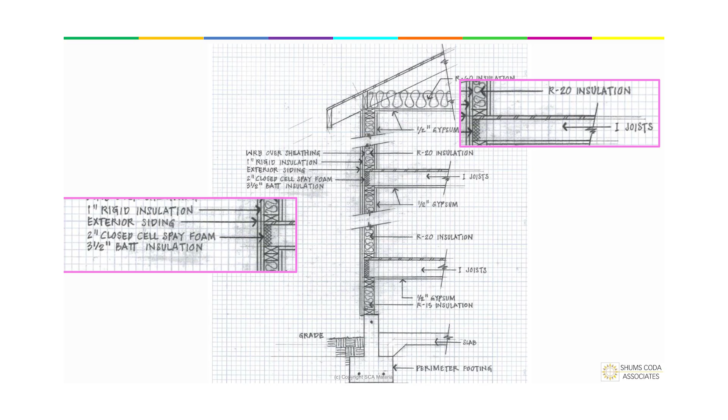What's the R value of that rigid insulation? Remember I said that mineral wool rigid insulation products go from a 3.8 to a 4.3? That's not quite an R5. And if we take a look at the styrofoam rigid insulation, it does not get an R5 either.

So here's once again in 103.2, and it states you have to provide the R value and the material that's being utilized. Plus, there are some issues because it also has to work with what the vapor retarder strategy is. Now here's another one that talks about what the design is for that rim joist, but we'll get to that later.

So let's talk about our mass walls. They have to follow the requirements of 402.2.5. There's two numbers listed there. The first number is if it's being placed on the exterior side of the wall. If it's being placed on the interior side of the wall, you're going to utilize the second number. Now, what if it's placed in the middle? Which number are you going to pay attention to?

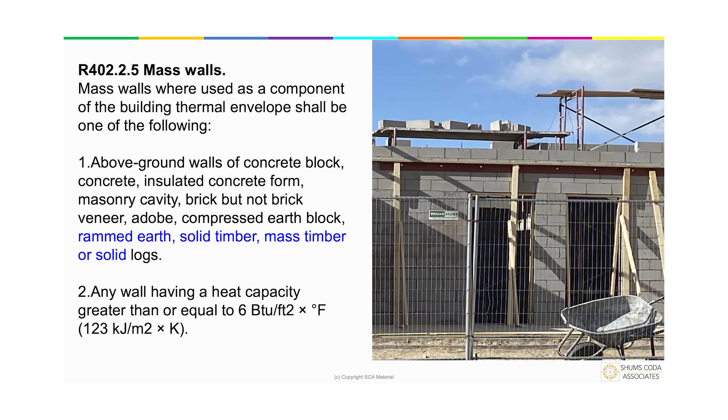402.2.5 for our mass walls - the really great thing about this, where the commercial side doesn't really take that into account, is we have all of these materials that are already deemed to comply as a mass wall. So we know if you're one of these, you're going to follow that part of the table. Or it also gives you an option that if by chance you have a heat capacity that's equal to or greater than 6 BTUs, then you're also considered to be a mass wall, just in case it's a new material that falls outside of these parameters. If they meet number 2, mass wall.

All right, let's talk about our floors. As you can see here, floors have some fun items to it. And did I lose my screen? All right, well, okay.

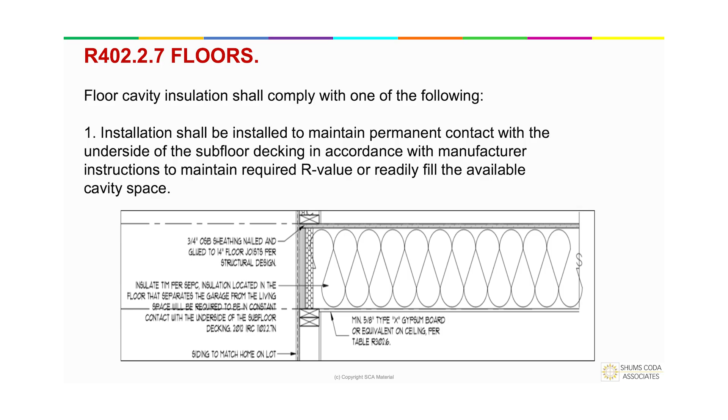402.2.7 is the section that deals with floors. And I probably should have mentioned this at the beginning, but most people look at 402.1, they figure out, okay, what's in the table, what do I need to do? The part that gets skipped is 402.2. 402.2 is our insulation installation section, and in that section, it provides a heck of a lot of flexibility on how you're going to design your building. So I'm hoping more and more people take a look at 402.2 because it is a great resource in trying to figure out how am I going to design this. I have this really funky thing - maybe there's something in there that gives you a hint like, hey, here's an exception. Use it. It's there for a reason.

All right, so floors. Number 1 says it has to be in constant contact with the underside of the subfloor. We've known that forever and a day - that's been in there forever, and it says that on the commercial side. But there's also a second option. The second option says, well, you don't necessarily have to have it in constant contact with the underside of the floor. We're going to allow you to rest it on top of chipboard, as long as you take those above grade wall insulation values and extend it down into that floor cavity. Great possibilities, right? Gives you some good options out there.

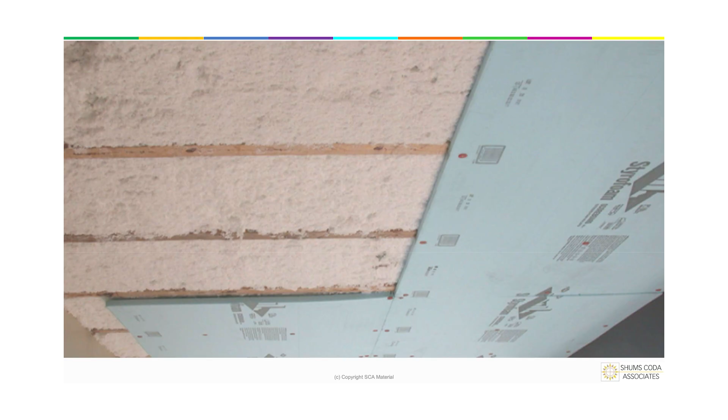Now, the third option is dealing with basically this similar item that number 2 gave us, except instead of resting on that chipboard, you get to rest it on top of continuous insulation, as long as you extend that wall cavity insulation or that wall insulation into the floor cavity, so that we are ensuring that we're maintaining the continuity of that thermal envelope, of that insulation, right? So here's a great example of they were using continuous insulation. They blew the floor cavity or the floor insulation that was going to rest on top of the continuous insulation. And I know it doesn't show it here, but the wall cavity went down into the floor cavity itself. So it was continuous.

Now here is a really fun one. This is really dealing with those basements. So basements have a little bit of funness to it.

So basements, as per what is listed in the definition of a below grade or basement wall for residential, it has to be 50% or more below grade. There are possibilities, especially with walkout basements, that you might have a section of the wall that's below grade and sections that are considered above grade. Typically how I see that designated on plans is there'll be a dotted line or hashed area showing this is the wall considered above grade, so it utilizes the above grade wall assemblies, and the remainder of the areas are below grade. That's typically the notation I'll see for it.

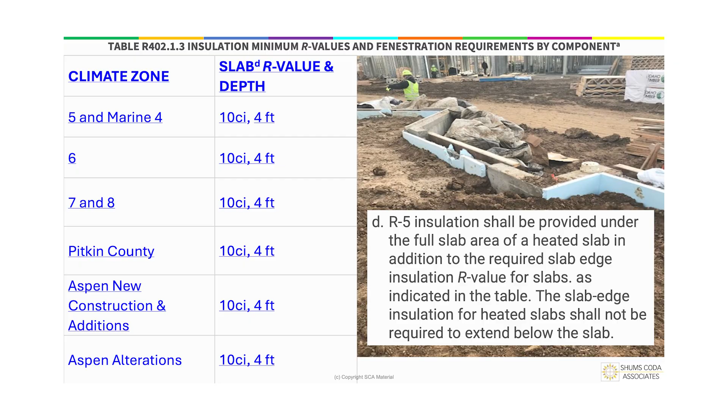All right, slab on grade. Here are our R values - I was pointing to my screen to show you where I was. You'll notice there's footnote D. Footnote D tells us, hey, if it's a heated slab, insulate it to an R5 in the entirety underneath that slab.

R402.2.9 tells us the slab edge insulation is only required when you have a slab that's 12 inches or less below grade. It must extend for the distance shown in the table. What do you see as far as the distance? 4 feet. What's your frost depth in an area you typically design to or inspect to? 4 feet? All right, so then you're probably looking okay on this.

One of the things to keep in mind is you do have a little more flexibility out of 402.2.9 - one option is how it can be installed where you have that 45-degree interior angle. We'll talk about that in a minute. But the one thing you have to be aware of is in the 2021 residential provisions, slab edge insulation is not permitted to be traded. In fact, it's never been permitted to be traded - that was never the intent. REScheck had a glitch, it wasn't caught until recently. So now we're really trying to illustrate if you're on the 21 or later codes, slab edge insulation is not allowed to be traded, and you won't have that ability in REScheck. 24 is a new story, but 21, no.

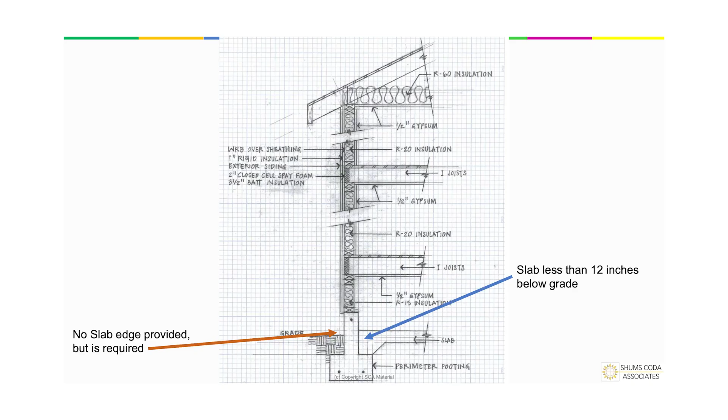All right, so if we looked at this plan, would you say that we're good? No, you're right - we've got a slab that's less than 12 inches, and we have no slab edge insulation provided on these plans. I'm so glad I have these plans because I use these plans like you wouldn't believe.

Another thing I see missing often is that when you have exterior or exposed foundation insulation, you have to protect it. Whatever you use, that covering has to extend down 6 inches below grade. Because guess what this is - this isn't 2 years down the road where I'm like, huh, that's interesting, all those pock marks that have appeared. This was at final inspection. What do you think's going to happen? I don't know if you know this, but sometimes it snows, and sometimes people have to shovel the snow. What do you think's going to happen when that shovel hits that exposed insulation?

That area is not going to last a single winter season. And if it did, what do you think kids are going to do? Have you ever seen kids not pick at a scab? After you tell them don't pick at it, right in front of you. I know my kids when they were little, especially my daughter, she would be picking at that all the time. No, they're going to pick, well, probably both. They'll kick it and pick it because they're going to try to figure out what they can do with it.

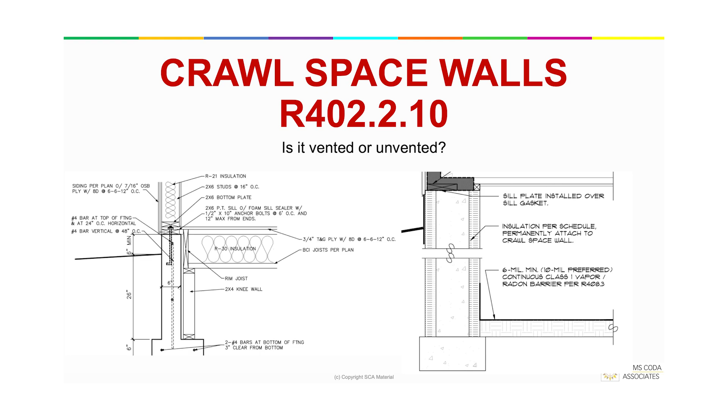All right, let's talk about crawl spaces. One of the things we have to be aware of, for crawl spaces and even attics, is whether it's a vented or unvented crawl space. If it's vented, this section of the code isn't a concern because we look at the insulation at the floor level. If it's unvented, I need to pay attention to what this table says, because our thermal envelope needs to extend down the walls of that crawl space.

So if you look at the image on the left-hand side, is that a vented or unvented crawl space? Vented. Why would you say vented? There's no insulation at the wall. Where it does show insulation is in that floor cavity, which means they did the correct thing - this vented crawl space has its insulation in the thermal envelope located at the floor level. They get a kudos from me on that.

Now the right-hand side, vented or unvented? Unvented, because we've got a vapor retarder covering the soil, the dirt, whatever you want to call it, and it extends up the wall like it's required, and we have insulation on the wall.

So that takes us to the end of our insulation section. Now we're going to have the fun part of talking about air barriers. I always like to talk about the fact that you should never have insulation without an air barrier because insulation gets its R value from stagnant pockets of air. So if you don't have an air barrier, what happens when the wind blows? Yeah, you get air exchanges and it strips those stagnant pockets of air, so you have a material no longer performing the way it should. You really do need that air barrier - think of it as a Siamese twin concept where you have an air barrier wherever you have insulation.

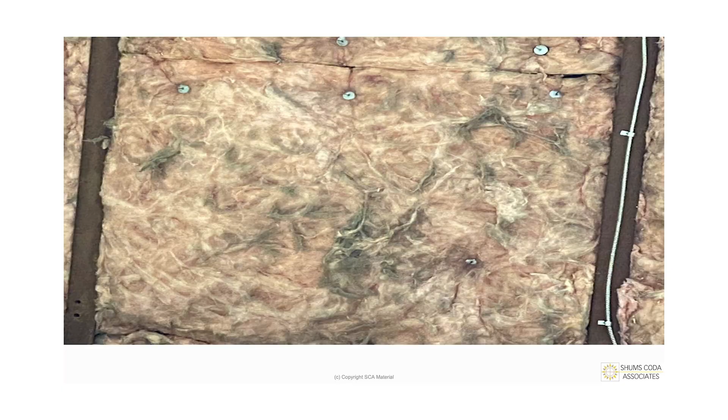Well, that's a filter. Exactly. It just became a giant filter for this building.

So I was in this building and saw this exposed. I should have taken a picture of it because we were running an event. I thought, not a big deal, they'll address it next year. It was not addressed. They still had it exposed, and I took a picture. I'm so mad at myself that I didn't take a picture the first year so you could see the drastic difference between the two time frames of the same insulation, because this was definitely significantly worse.

And it's all dirt. So what happens when that dirt takes up the space where the stagnant air pockets would be? Do you still have the same R value going on? Nope, you reduce the R value for it.

The other thing is 103.2 also says that you have to provide a detail. A picture is worth 1,000 words, because if I show a picture of something, I am more likely going to get that out in the field as opposed to writing all of that.

Here's a great example. How many of you have ever had a conversation with another person in the code world and said, hey, doesn't 103.2 say XYZ? And they say, that's not how I read it, I read it as STU. And you have the discussion. Those words haven't changed, they're the same words that this person's reading and this person's reading, but due to each of their own life experiences that play into how it's interpreted, you have often different interpretations.

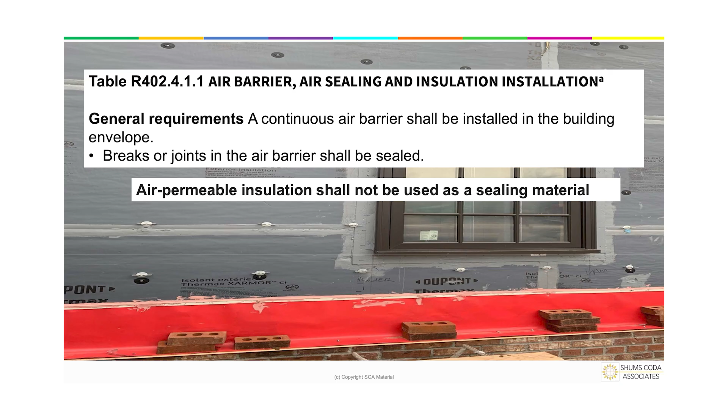All right, let's go through our lovely table 402.4.1.1 and talk about some of the things. So the first one is, hey, you better make sure you've got a continuous air barrier all throughout your building. You might have to change locations and so forth. That means thinking about your ceiling level, if your insulation is in the attic, or if your insulation is entirely above the roof deck, then that's the area that you need to pay attention to for air barriers.

Now, I remember when zip panels came into the scene and they were calling out, oh well, we can be an air barrier system. They can, absolutely. And they demonstrated that they can do it because they just can't exceed that 0.004 CFM per square foot of air leakage. And they do that. So there's a lot of different materials out there.

It could be house wrap. Again, it's got to be installed the way that it needs to be to meet that criteria. Now, as far as zip panels go, remember that you can't use your hand to flatten the tape, it has to be the specialized roller. And guess what, that specialized roller says zip on it, so it puts a little indent in the tape to let us know that it is the correct roller being utilized.

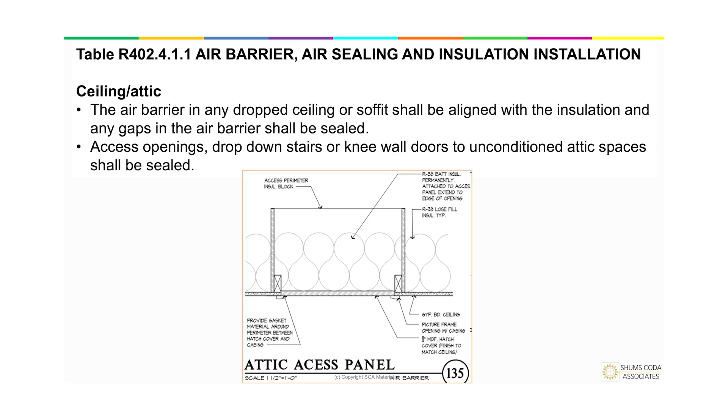All right, ceilings and attics. We've got to ensure that we have an air barrier in alignment with whatever our insulation is. So that's taking into account things like maybe when you are utilizing part of the roof trusses, you need to make sure that you include that. Also, attic access openings.

I think this has been in the code for a while, and I think we're probably fairly good at ensuring that. Just make sure that you have that weather stripping or sealing of some sort, because often when testing, if it is leaking, that's an area that can have it leaking in, and it's a simple area to ensure that we just meet that.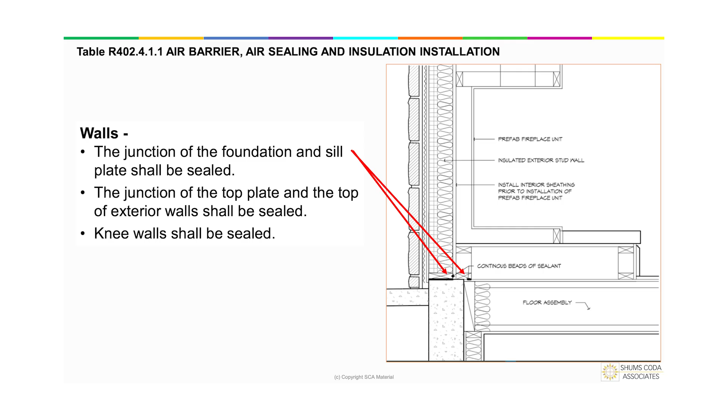Walls. Walls, we have to ensure several things. One, let's talk about the bottom plate. That bottom plate has to be sealed. So we should be seeing notes listed on here, and as you can see here, it's calling it out: continuous beads of sealant.

We also have to do it at the junction of the top plate, and as you can see here, it also demonstrates that they are sealing it. Here's an example of it out in the field where they actually did a really good job with it. What about this one? What do you guys think? Good, bad, ugly? Came up a little short.

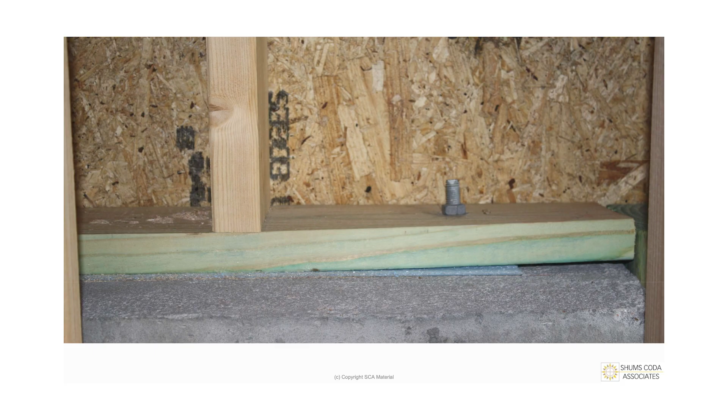So I'm assuming you guys are referring to the seal here and the gap there. What's the seal for?

Yep. We have to have that capillary break because that foundation wall is going to draw moisture in and bring it up, and water and wood don't always get along. We kind of like the idea of not having our buildings fall down from wood rot. It's kind of a crazy concept that we don't like being on the news for, right?

So the seal is a capillary break. It's actually not to be used as a sealant. It could potentially be considered a seal if everything was snug and there was no way for air movement to come through there. But unfortunately, construction is not perfect. There are things that happen, maybe minor defects in the wood, the grain of the wood - it's not going to quite work. So setting a project up to succeed is not necessarily utilizing that seal as your air barrier.

What do you guys think about this one? I gave you a hint - the arrows came up, I forgot to put animation on it. So they sealed here.

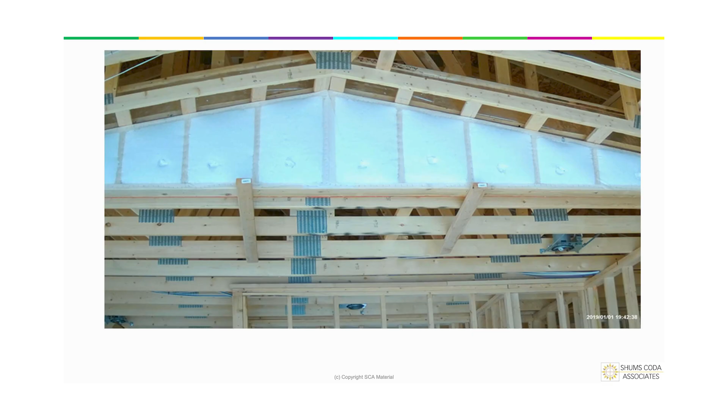Now the other thing is talking about knee walls. Typically you see them in attics, but I've had knee walls in a different part of the country - they're all over the place in crawl spaces, and it's part of their thermal envelope. So if it's part of your thermal envelope and you have that knee wall, not only do you have to insulate it, you also have to have an air barrier on it. And I have lots of people who say, well, they didn't seal that air barrier up, and I'm like, you are absolutely right - they got out of the way so I could take a picture of it. So they weren't at the completed process of it.

Now let's talk about windows and doors. You have to air seal those windows and doors. You also have to install them per the manufacturer's installation instructions.

Many window installation instructions call out that after you put everything in, your fins in, it's sealed up, shims in place, they talk about stuffing batt insulation in all of those crevices. That insulation is not for air sealing, it's just to put something there as a bit of a blocker. It also talks about then sealing around those windows. So be aware, while it talks about putting batt insulation in there, that's not what they're calling out as their air sealing of a window.

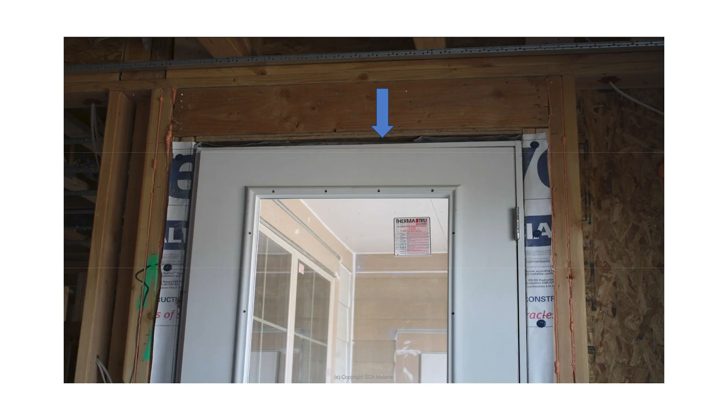This one was missing a lot of sealant, whereas this one did a good job of sealing. This one also did a good job, though it's really hard to see. I was excited because this location was just starting the energy code, they'd probably been doing it about a year and were training everybody. I went out there to walk this project with them, and it was exciting because they said, look, they use the right stuff on these windows. In the past, apparently, that was an issue.

Let's talk about rim joists. Rim joists have to have an air barrier, and you also have to seal them up. There's a lot of blue there.

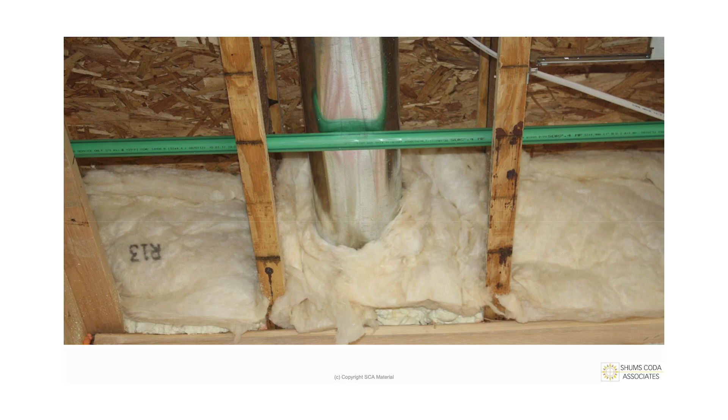This table doesn't necessarily have a lot of new requirements in it. What they have is a lot of rewording, because they're finding it's not getting put on the plans correctly and it's not happening out in the field, so they keep changing the wording to really convey what they're asking for. Basically, in that rim joist area, they want it sealed up so we don't have that air movement going on, and they want to ensure you're putting an air barrier there.

Now in this particular design, how many of you say it's a good design and you're okay with it? Everybody's hand should go up, because we have spray foam behind it. And because there's spray foam, it has to have that ignition or thermal barrier protecting it from the interior side of the structure, so that's what the batt insulation is for. The install of that batt insulation is atrocious, and if it was there for the thermal envelope it would fail all day long, but it's just there as the ignition and thermal barrier.

Floors, you have to have an air barrier involved, and you also have to seal up those junctions that are going on there. So in this instance, this area here would have to have an air barrier, and so would this area here.

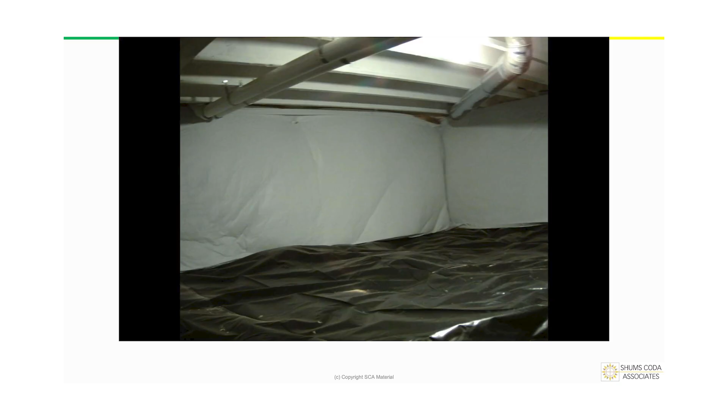Basement walls, slab, and foundations, we have to ensure we have the typical design required out of section 408 of the IRC, our vapor retarder. We also have to ensure we have insulation in there. And the big thing is if we have any penetrations through that foundation or slab, that they're sealed up, which makes sense.

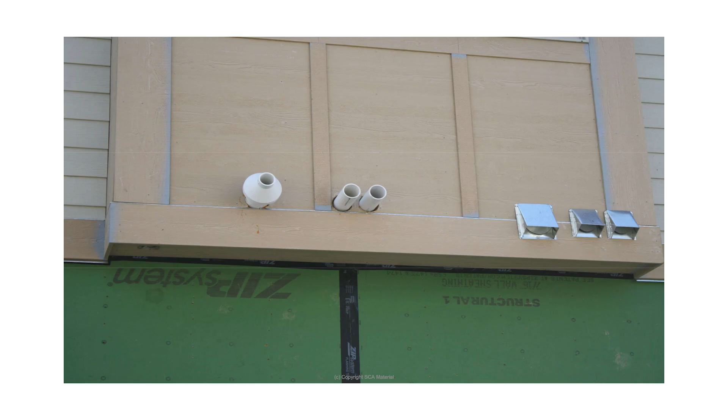Here's a great example, I have a builder friend I go out and take pictures with all the time, he's really energy focused. His policy is if you're going to put in a 2-inch pipe, you're permitted to bore a 2.5-inch hole. The idea is that if it's not a 6-inch hole going in there, there's not a whole lot of sealing that has to happen from that, but it also takes into account some of the expansion and contraction that's going to happen with our environment and climate.

If you look right here, you could actually look through the wall. This usually indicates their question was, 'I failed my blower door test, why do you think I failed it?' First thing I'll do is walk around the exterior of the building, because a lot of times it's something as simple as this. Chances are they said, hey, go seal up that penetration. They took the caulk they were putting on the bathtub and thought, well, it's sealing up the bathtub, why can't it seal up right here?

Well, that's outside. You've got to have something appropriate and compatible. Is that something that can be used on the exterior? Can it be exposed to UV? Can it be exposed to weather? Those are all things that have to be taken into account.

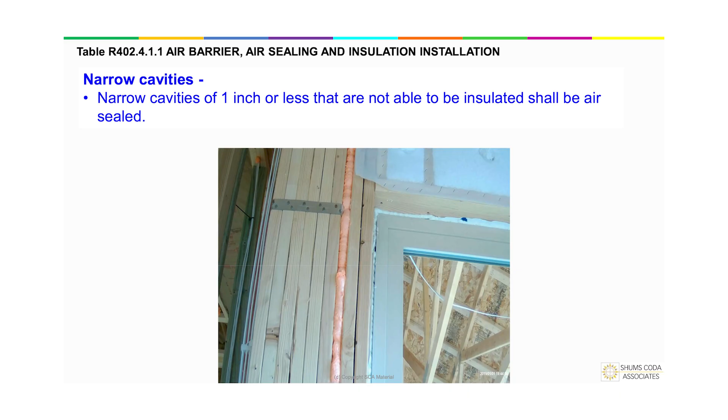Narrow cavities - this is new in the 21. Basically, if you have a narrow cavity that's an inch or less, you have to air seal it. A lot of times what I see is they're just grabbing a can of fast expanding spray foam and bloop, there we go. Typically I just see it as a note on the plans.

Garage separation - you have to have an air barrier to separate your garage from the rest of the dwelling unit. Is this something we need to be concerned with? How many of you say yes? How many say no? I say no, and you say, Hope, you're just telling me I have to do this.

Let me explain why. What if we go into 302.6 of the IRC? What does it tell us? We have to separate our garage from the dwelling unit wall with a 1/2 inch or 5/8, depending on where we're at. What do we have to do if we have living space above? Separate our ceiling floor level with 5/8 type X. The IRC takes care of that.

But am I going to ensure that it's shown on there? Absolutely. But if I have to divide my time between this and something else, this I know is getting addressed on a consistent basis, so I'll maybe focus on something else. I still worry about it, I still ensure that it's there, but I may not worry about it as much as some of the other things.

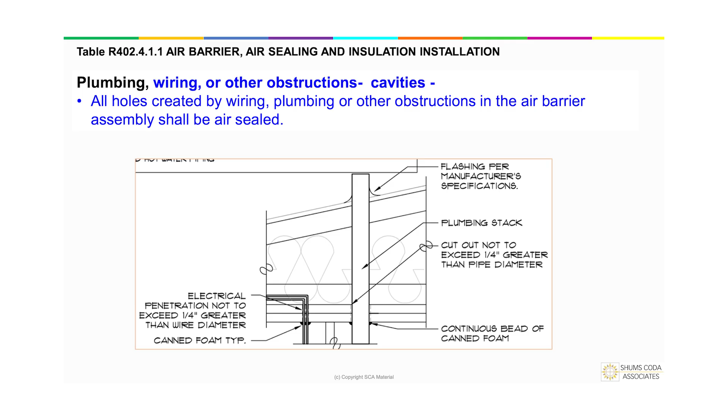Recessed lighting, just like on the commercial side, has to be IC rated. Air leakage - it's got to be sealed up from the housing and the wall or ceiling, wherever it's being done. We have to seal up holes that are being created by wiring, plumbing, or other obstructions in the air barrier assembly.

On this one, you'll notice we've got jacks up here, and we're also showing some sealant down here. Where am I paying attention to the air barrier? What assembly? Where's the insulation at - it's resting on that ceiling level. So this is what I'm paying attention to: that gypboard is being my air barrier, so the penetration is going through the gypboard. This is the ceiling, the C ceiling, that I'm paying attention to as far as air barriers and the energy code.

All right, tubs and showers, when they're located on the exterior wall, we have to have an air barrier. This is the assembly order that it needs to happen: sheathing, insulation, stud, air barrier, then tub shower. So that's the order we're looking at.

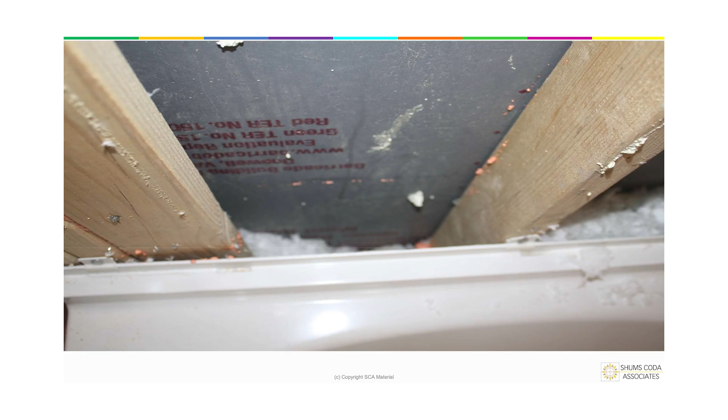Here's one I was actually walking by, going into a different room, wasn't even looking at this, but I got into the other room and apparently I'd seen enough that in my brain something told me there's something wrong. So I went back and looked, there's some insulation thrown on there. We got insulation here and here because these are our exterior walls. That's why this is all pulled out, because there's no air barrier. So they pulled all that out because they now have to put an air barrier separating that tub from that insulation and then re-insulate it.

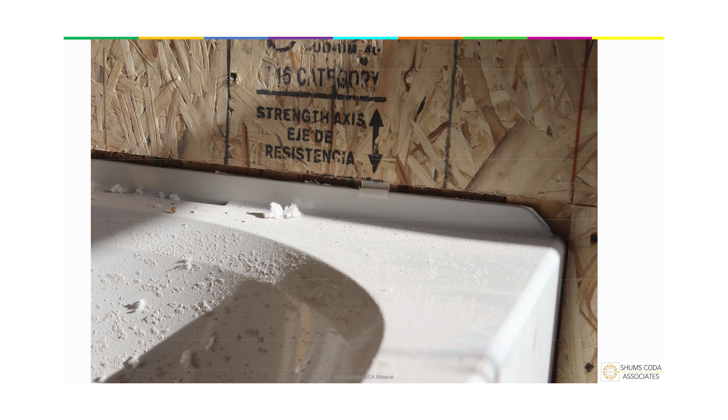I can't tell you how many times with showers and tubs, if you look at this, you think, oh, that's not bad. And then you look, and it's like, ooh, we need an air barrier here because they cut all around here. Not only that, when you looked in there, that wall didn't have any insulation in it either. So that could be a bit of a problem.

All right, electrical or communication boxes - you have to seal them, air seal them, when they're penetrating through the air barrier.

One of the other opportunities is you can comply differently. What it says is not that you have to have a self-sealing box, but if you do install an airtight self-sealing electrical or communication box, it does have to demonstrate that it meets NEMA OS4, so that'll have to be shown on there. But we just want to make sure we're sealing things up.

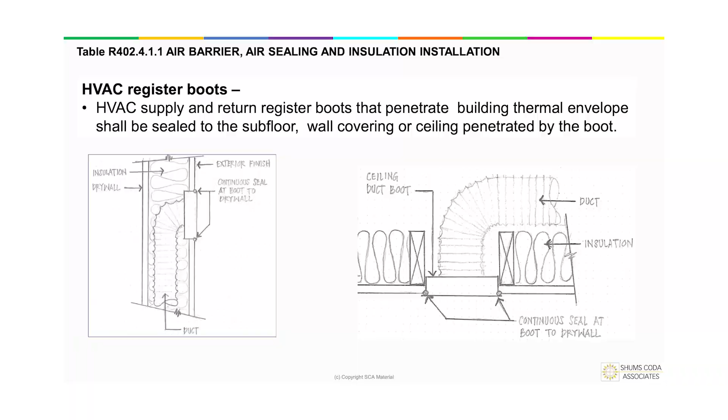And speaking of sealing, let's talk about our ductwork. Our registers, as they penetrate wherever the thermal envelope is - walls, floors, ceiling, whatever - we want to seal up where it is in communication with whatever the subflooring is. I know I didn't express that very correctly, but here are some examples of it being sealed up where we want it to be sealed.

Just like on the commercial side, if you have concealed sprinklers located within the thermal envelope, only where the thermal envelope actually resides, you do have to seal them up in the fashion specified by the manufacturer. As we discussed earlier, we don't have those yet, so start asking for them. Here's an example from when I went out with the National Fire Sprinkler Association, because they're the ones who put that in. They come out periodically and we walk around things, and this community always says, come out, see what we're doing so we know what we're doing right and wrong.

So we had this - they were horrified with what they saw in that project. But here's an example of why would we care: if you see how much gap is there, that's really going to have an impact on your blower door testing and your results. Just be aware that in the 2024 code, your blower door test results are reduced. So these are the types of things we want to ensure - the little things are going to make a huge difference in the future. Let's get them done now so it'll be easier for us later.